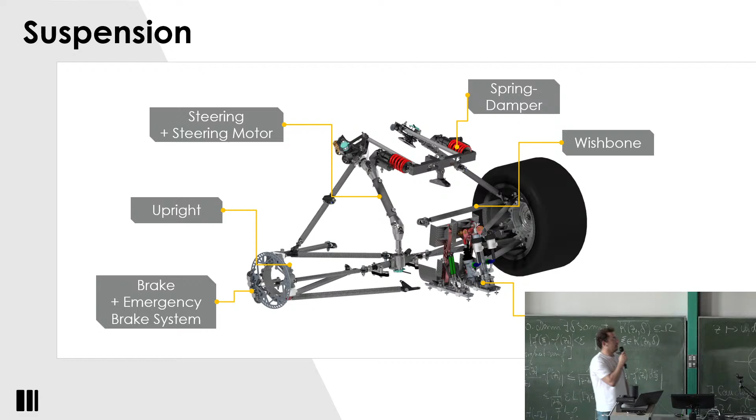So everything in the steering for our autonomous car, we also do the steering motor, which is a pretty cool design. Then the spring damper system to make sure we have the best mechanical grip we can get, the wishbones, and the upright that basically holds all the parts inside the wheel assembly. Then also for our driverless car, the emergency brake system, which is basically a device where we can hit a button and the car will stand still or brake hard, and also help our driver get a good feeling for the throttle and brakes.

Then also a big part is vehicle dynamics. It's a pretty interesting and major part of our whole team, because in vehicle dynamics we basically make major decisions for our overall concept. We do analysis for concept decisions, like which tire to use, where we want our mass distribution, as you can see in the graph at the bottom, and other things. We have a self-developed lap time simulation where we can see what different changes in parameters like weight have on our lap times, and thereby decide what we want to do with the whole car.

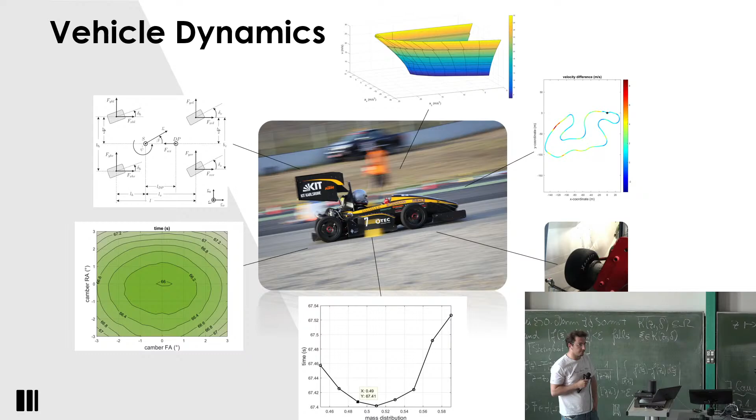Then also a big part, which basically combines the two things, is testing and validation. In the summer we do a lot of testing on our X-Platz, as we call it, or it's called the Campus Ost. We can see what the changes we made have achieved in lap time and overall performance, and also test with sensors whether the changes happened as expected, or if we've made some big errors or failures, because it's always important to see if the changes bring you any good.

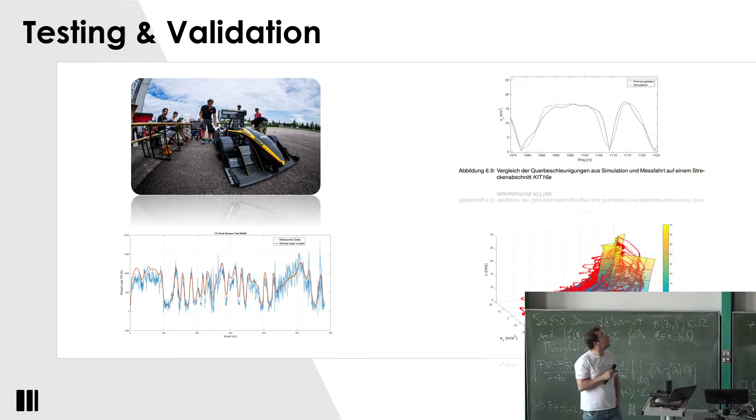For testing, we also go on test benches. Here, for example, you can see a test bench at KA. It basically moves the car up and down to see if our dampers are rightly adjusted. The basic goal is that the tire is always in contact with the platform and that there are no big changes in the normal force on the platform.

But we also do pretty straightforward road testing. We do some tuning testing, just steering in certain ways and looking at what force we get at the steering, and checking if these forces match what we calculated they should be.

So it's a perfect mix of designing, calculating, and testing. And I think now we will explain more so we can discuss that.

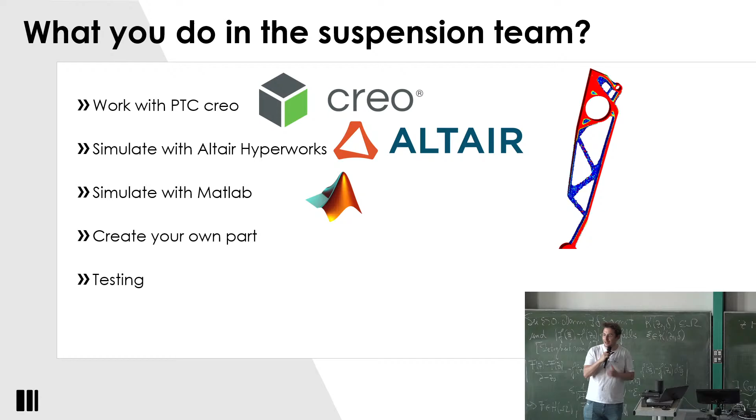Hi, I'm Robin. I'm currently the sub-team leader of the aerodynamics department. One slide, please, again.

What we do is design an aero package for the car, so we have the most flexible downforce you can get, other than in Formula 1. The drag - German Luftwiderstand - isn't important because we drive slower than 100 kilometers an hour on a regular basis, so we only care about maximum downforce. Our part of building the car is to build a package that provides the most downforce while having the best balance for the car, so the driver has a really stable and good drivable car.

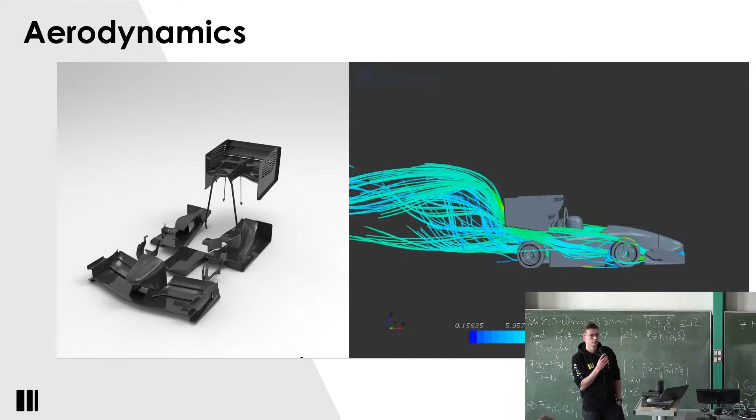You build your part, for example in Creo, and then we simulate it and see what effect this part has aerodynamically on the car. After you see the effects, you can change it, simulate it again, change it, simulate it again, till the whole package works well together.

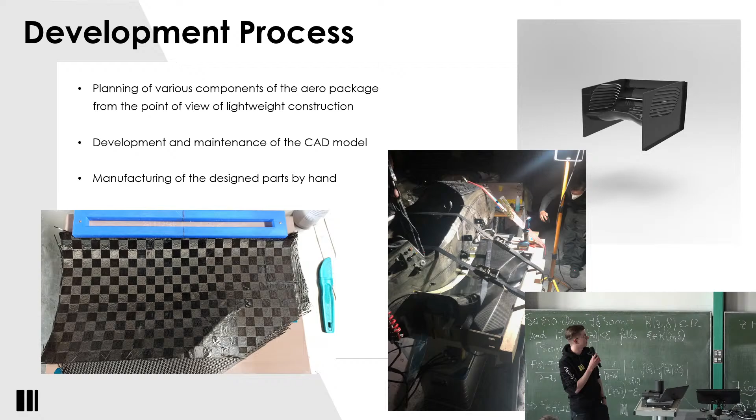And after we are finished, after a month of development, we will build the car at our workshop out of carbon fiber, and this is all manufactured by hand. And for the CFD part, our CFD lead is going to explain something to you.

Hello everyone, I'm Akshay and I'm doing the CFD for this season. So as my dear team lead already mentioned, once anyone has designed a part in Creo, you have to check it in a virtual wind tunnel, because in aerodynamics the parts may not work as intended. So it's always good to run all the iterations through a CFD software and check how it's actually performing.

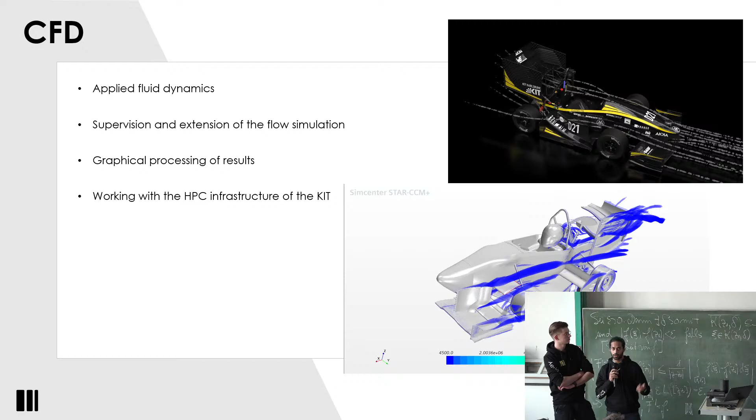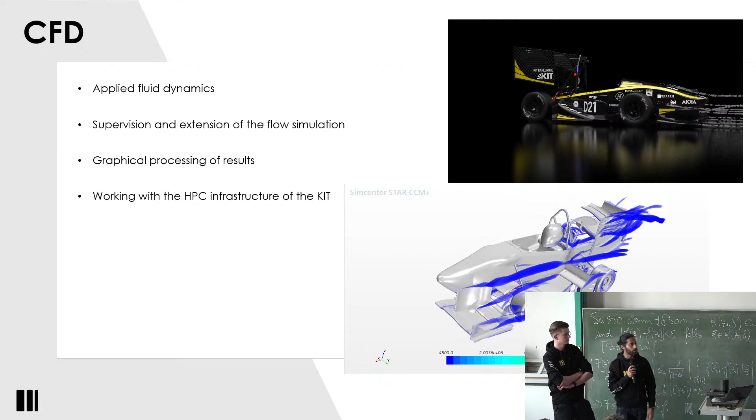For this we use a software called STAR-CCM+, a CFD software by Siemens. In our simulations we generally have two types: a straight line simulation or a cornering simulation, where we either simulate the car going straight or have it cornering. For this we generally use high performance computers, like supercomputers such as the bwUniCluster or HoreKa Cluster. On average, including all the processing of images and solving, it takes about 6 to 7 hours to solve one simulation.

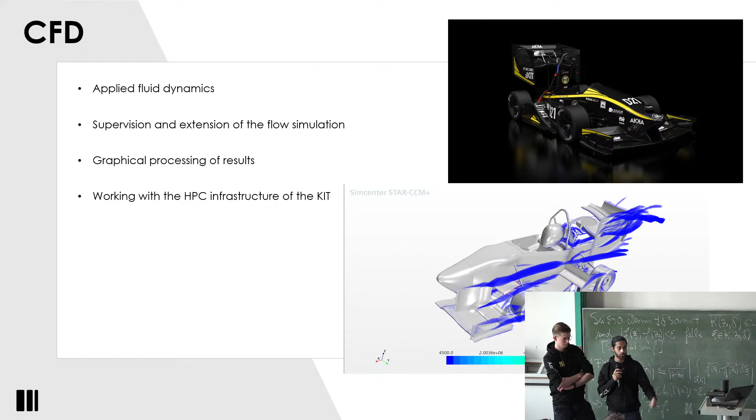So once everyone's done with their part, I'm basically jobless. But there are other things you can do as the CFD person. You can write different macros to automate the process as much as possible, which is really useful, and for that we use Java. So yeah, that's part of the CFD.

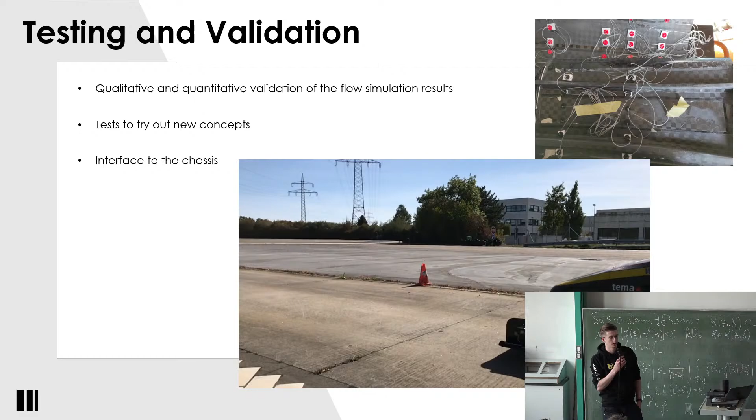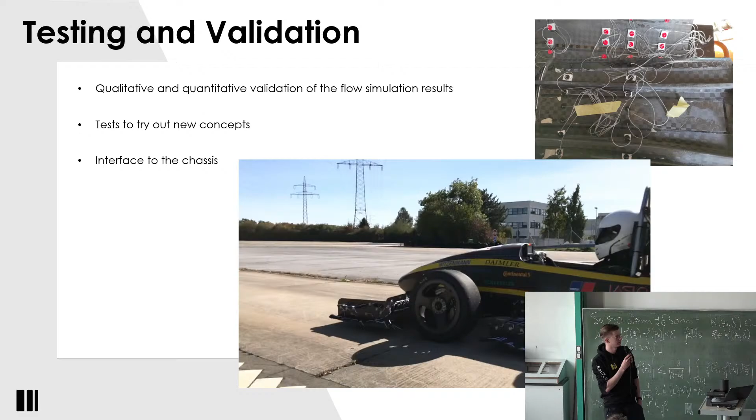Thank you. The last thing, once we've finished our aero package for the season, is to test and validate it. We have all the simulations done, but the question is whether in real life the aero package works as intended. So we build aero rakes, which you may know from Formula 1 testing phases. We build them with different kinds of sensors, as well as building testing wings and running different tests. With that testing, we work together with the suspension sub-team to see how the car performs and how we can tweak it to have the best performance as we go through the races.

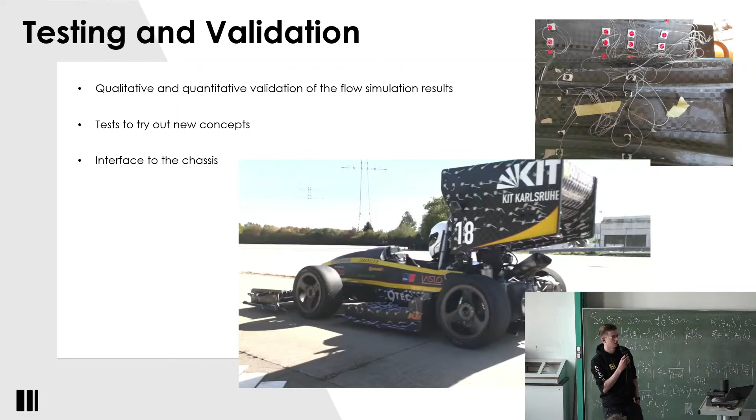Hello, I'm David, I'm a member of the autonomous system team. What we are doing, we are responsible for our driverless car, and we are developing the software for it.

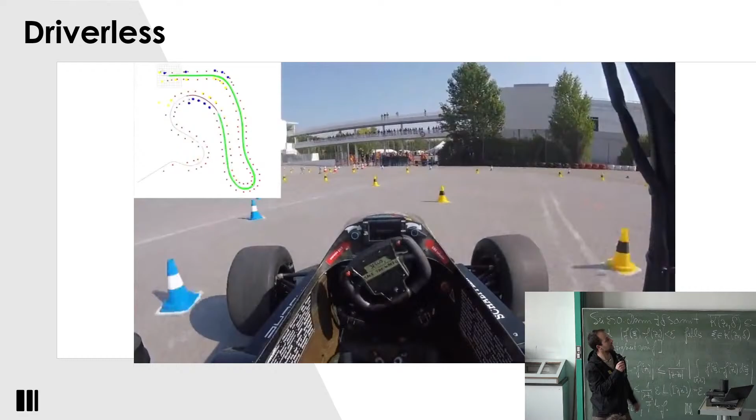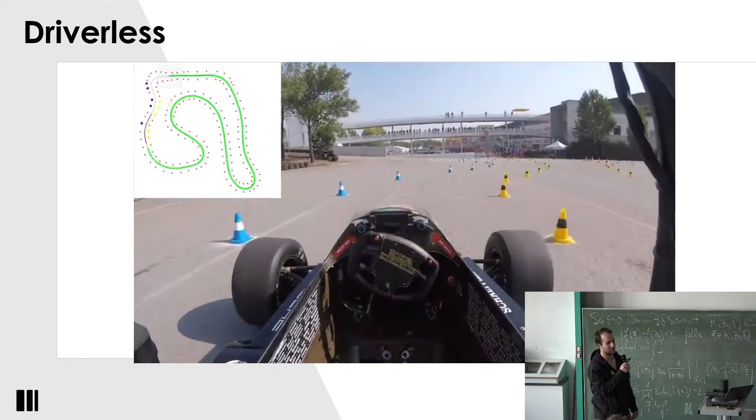What are we using for that? Like I said, we're doing the software development mainly in C++ in the framework ROS, Robot Operating System, but we're also using some other programming languages like Python or MATLAB. If you know them, it's good to work in our team, if you don't, it doesn't matter, you can learn them.

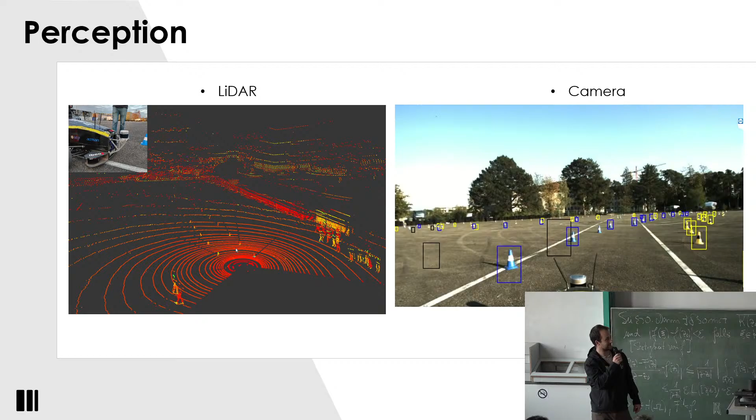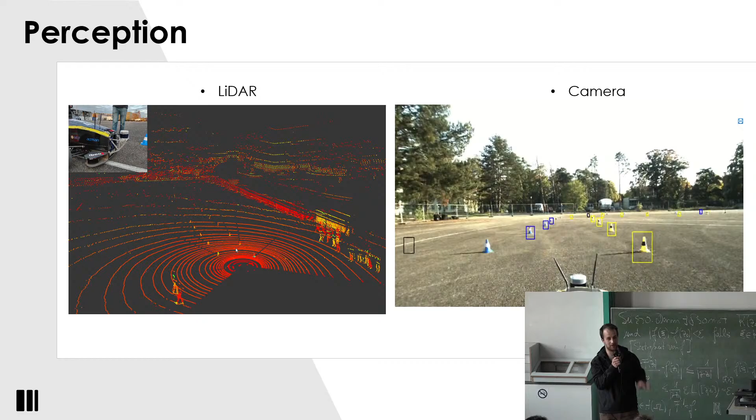On the next slide you will see our perception. What we are using for perception is the lidar on the left, giving us a point cloud to detect the cones. We also use, or will use, a camera to detect the cones, where we use a neural network to do the classification of these cones.

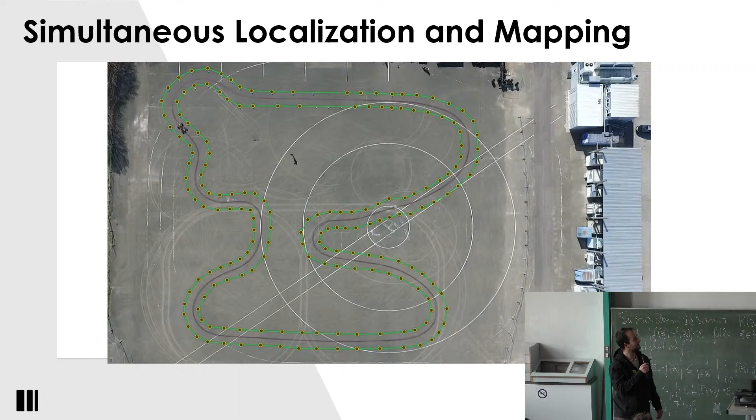So how does the work in the autonomous systems team usually look like? Well, of course we are coding, we start writing the code. Then we test our code in a simulation before we afterwards go to the track and test our car in real life. For me personally, that's the best part, when you can test your code on the real car and let it drift around the corners.

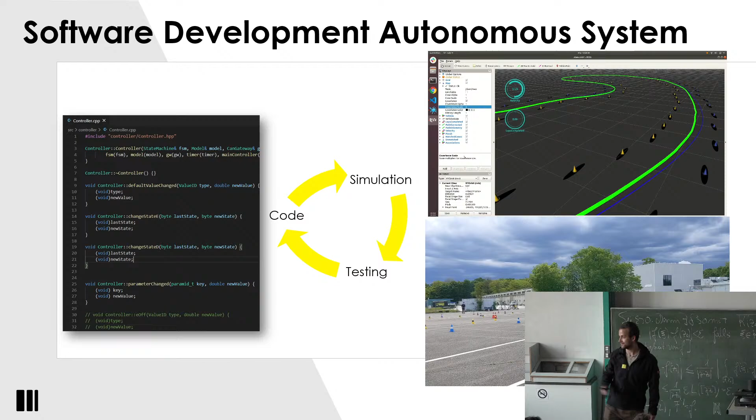Then to the electronics, I'm also there, I'm the subteam lead of the electronics. The electronics work is split into two major things. One thing is the software development for our microprocessors, the TM4Cs, which maybe you know from the electrical engineering workshops at the university. But we also do the hardware design of all of our control units.

So none of our control units in the car are bought from the manufacturer. We design them all on our own, program them on our own, and use them on our own.

So we also have the hardware development and the software development, and of course we need to analyze what's happening with our control units, and that's where CAN bus comes into play. That's the communication bus in our car, used in basically every car in the world.

Next slide. How does the development process look in the electronics team? First of all, we try to think about ways to improve on our current design. If it's perfect, nothing is changed. If not, we have to change something. So we start with the schematics.

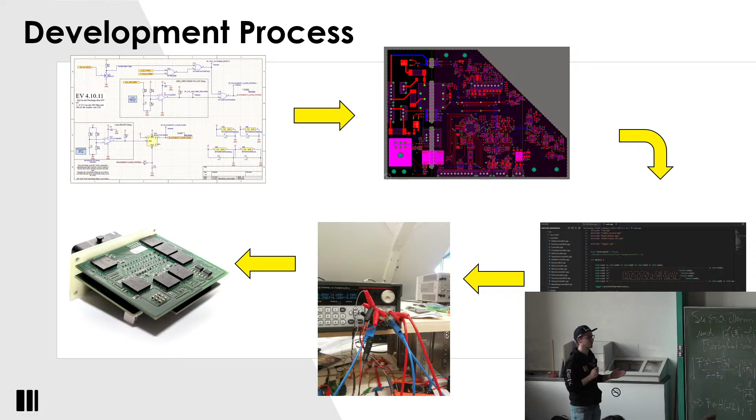If you wonder what the pictures are about, the picture in the middle, the colorful picture, is our circuit board, which is the high voltage battery management system. This is the board which is inside the accumulator container, and basically makes sure that our battery doesn't go into flames. On the next slide, you will see some other products of ours.

On the top left, you see our wiring harness, because we have to connect our control units somehow. On the top right, you see basically the switch in the car, which is responsible for turning the car on and off, or the control units for that matter.

Then our sensor boards, because we have to know what is going on with the car. That's why we have sensor boards to look at the sensor data and give them to people like the suspension team, because nobody knows what they are doing. On the bottom right, you see the final masterpiece working.

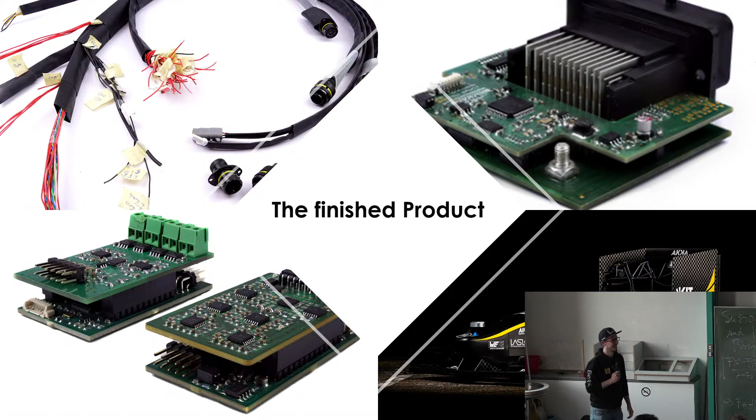On the last slide, I have some quick facts for you. We have around 30 electrical control units, all designed on our own. We also use professional equipment, stuff like Altium Designer, which is used in the industry, or the software we use to analyze the CAN bus, which is also used in the industry.

That's the great thing about KA-RaceIng, because all those firms which produce that software give it to us for free. I already told you about our control units, stuff like the battery management systems, or the main control unit, which is the brain of the car, and turns it on or off, and tells it how to drive. That's for the electronics.

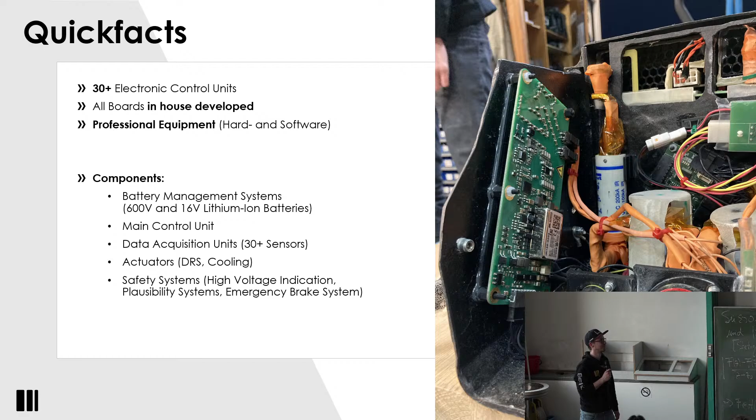I hope I could convince some of you. And the next one is wonderful.

I'm Felipe. I'm in the second year of KA-RaceIng, and I'm the sub-team lead of the chassis or monocoque sub-team, which is responsible for the biggest part of the car, the monocoque, and all the other structural parts of the car, which means the rims and the seat and so on.

Now the next slide. Here you can see the CAD model of the chassis from last year. Basically, the huge carbon fiber part is included in the chassis sub-team. You have the rims, which are made out of carbon fiber, the ergonomics, so the seat and the steering wheel, which you have to design as well, so the driver is as comfortable as possible.

Then you also have the crash box in front, because that's mandated by the regulations. You have to make crash tests for that to demonstrate that it actually works, because it's important that the driver doesn't die in a crash if it happens. Then, of course, all the carbon fiber parts have to be simulated beforehand, because we don't have that much money to build a thousand prototypes to test them. That's all the most important parts included in the monocoque sub-team.

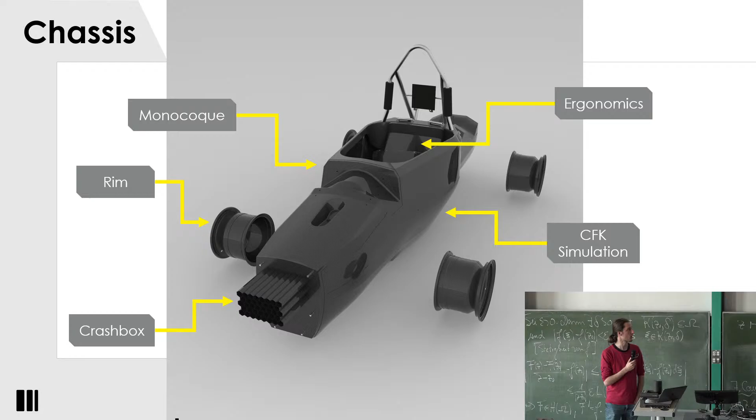So the general process of the monocoque is you do some pre-development at the end of a season or at the beginning, test out what kind of configuration we want in the car, where's the battery, how does the battery look, where does the driver sit, how does he sit, is he more upright, is he more reclined, and so on.

Then you develop some concepts in CAD, see what works, what doesn't, try to realize your ideas, and then you design more, do some Creo work, or try to get it to work with Creo, which never really works the way you want. That's an image of the current model in CAD that I designed for the monocoque.

After the design, you move to the manufacturing, so you start laying some carbon fiber. You can see the monocoque from the inside, or on the right side, you see the first layer of carbon fiber, where you try to lay it as cleanly as possible, so you get an accurate representation of the simulation and the real world, so you can compare those two.

You try to lay the carbon fiber, and after that, you have the rolling chassis where the monocoque is completed, and you can move on to manufacture all the other parts. That's the general design process.

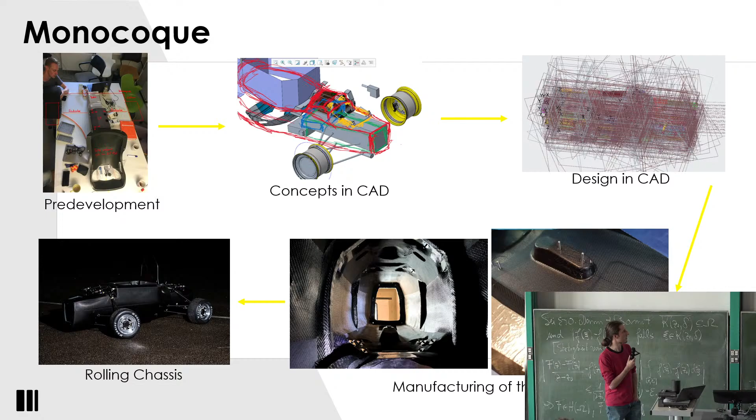Then there's of course the simulation, because the chassis gets huge loads from all the wishbones and so on that are transmitted into the car. So the chassis has to be simulated to withstand those forces, which is a very long process, all done in Altair HyperWorks as well.

We use that not only for the FEM simulation of the suspension parts, but also of the carbon fiber parts, which is a very long, but also very interesting process that is complicated, but you can learn a lot from that. It basically uses all the loads we get from the different parts in the car.

And then tries to make a light car that is still very stiff for the suspension, because if the chassis moves or twists under load, that's not ideal for the suspension, because then it behaves in ways you don't want. So we have to make sure that the chassis is stiff and doesn't move.

But if we make it stiff and immovable, it also gets heavy, which is also not good. So we have to find a compromise and make it as light but also as stiff as possible, which is what we mainly use the simulation for, which we then try to apply to the manufacturing.

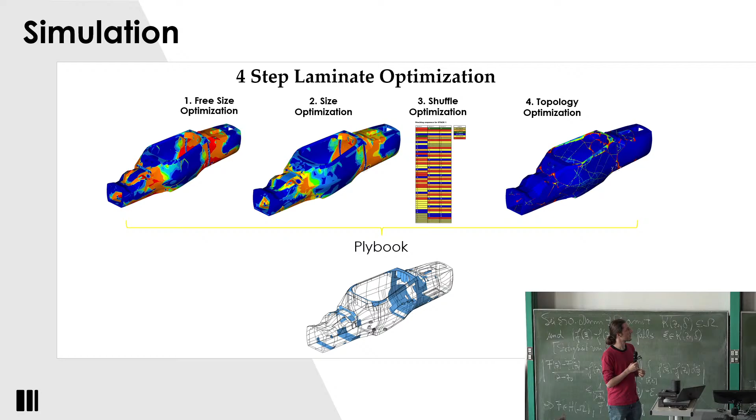Then you obviously do some simulations on the carbon fiber rim to make sure it doesn't break like last year. That's a funny story for later.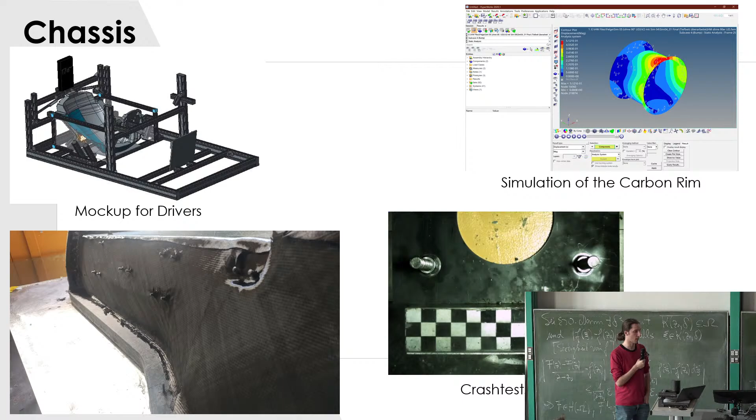And then on the lower left, you can see the current picture of the current chassis that we are working on. This is from yesterday, I think, which is basically where we are manufacturing a mold for the chassis out of carbon fiber as well. So not only do you do simulations and designing in CAD, but you also work with carbon fiber.

Now we have the powertrain. Hey, I'm Vincent, I'm from the powertrain. Next slide, please.

Thank you. What parts are in the powertrain? Firstly, we have the battery. Then they give juice, power, to the inverter and power electronics. They distribute the power to the electric motors. And the last part in this chain is the gearbox, which then gives the power to the wheels and to the tarmac.

So the powertrain is vital for the car to drive, because if the battery is not juiced up, there's no drive. Next slide, please.

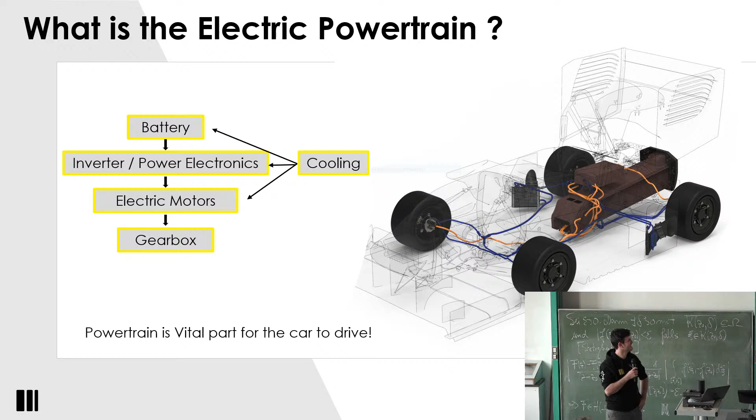So here, some hard facts, quick facts. The battery has a peak voltage of 600 volts, energy of 7.3 kilowatt hours, and a weight of 52 kilograms - the battery is the biggest part and the heaviest part in this car.

And then we have a picture of the gearbox. One gearbox can give the wheel a maximum torque of 300 Newton meters. We have 4 of those in the vehicle. One weighs 2.1 kilograms, and the efficiency is at 97.2%. That's already pretty good, but we want to do better. That's why we need you.

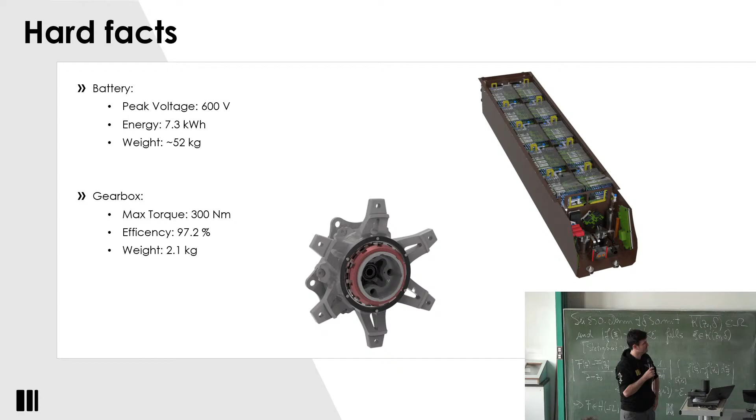Next slide, please. Yeah, how do we develop the powertrain?

So this is basically the same in all sub-teams. We have different phases in the year at KA-RaceIng. First of all, we have the concept phase, where we decide what we want to change and do better, or leave it as it is.

After that, we go into the design phase, and that's where the actual construction is done. We mainly work in CAD, but we also have other software tools, as you can see at the top there. After the construction, we also have to validate via simulation that the things we build in CAD aren't crap.

We are also very proud that we basically build every part of the powertrain, and every part is self-developed. We manufacture the motors, the power electronics, the battery. Basically every part in the car from the powertrain is self-developed, as for the other sub-teams, the other parts, but especially for the motors we are very proud.

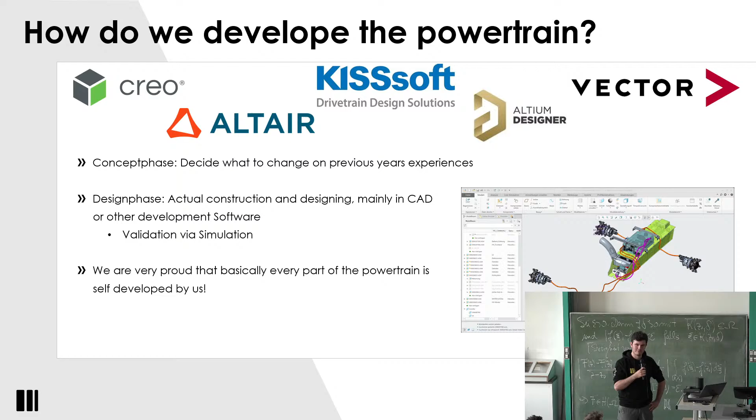After the designing, what do we do? We build all the parts ourselves. On the top left, you see a picture of the manufacturing of the PCBs for the power electronics. The second picture is from the manufacturing of the batteries. The next pictures are from the motor, gearbox, and cooling system. So basically every part is built by ourselves, as I said before.

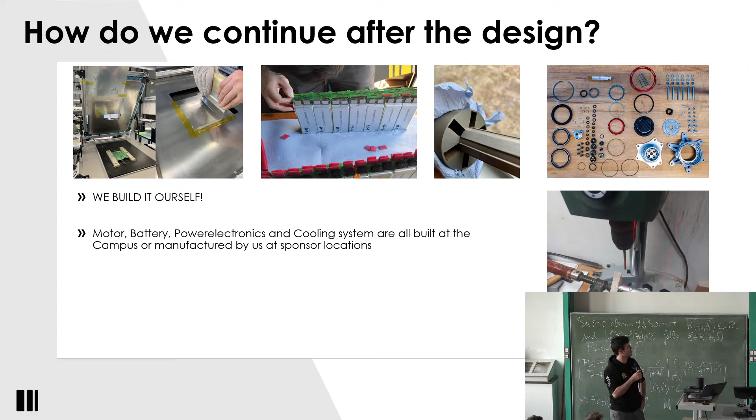Or they are manufactured by sponsors of us.

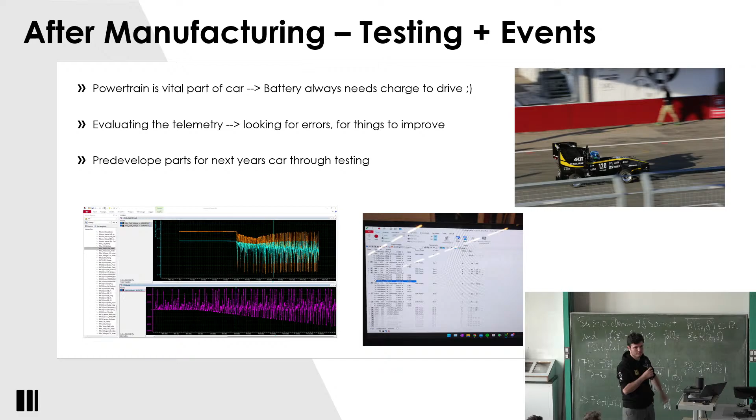After the manufacturing, testing, and events, this is where the fun begins. We evaluate the telemetry, look for errors, things to improve. Is the car behaving as we want it to? With that information, we can pre-develop basically every part for the next years through the testing. So that's quite cool.

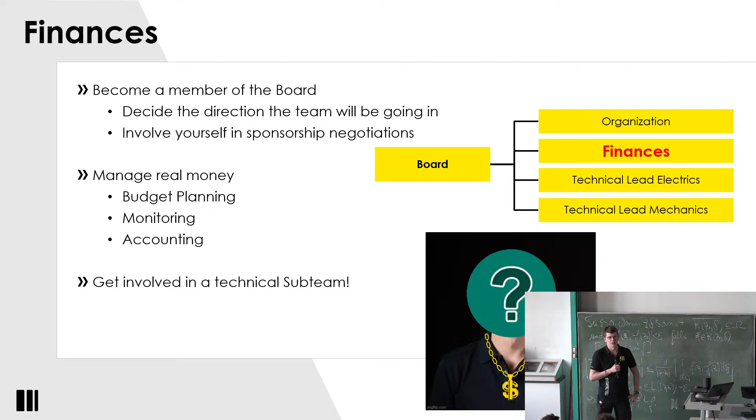But it's also possible to get involved with a technical sub-team, so you don't only have to do finances. Most of the finance guys in the past, and me as well, were involved in a technical part at some time. So we hope to get some of you to become a finance guy.

Yeah, so over to the marketing. Thank you. Hi, I'm Farabi. I'm this year's marketing sub-team leader.

One obvious thing about the marketing is, of course, we manage our social media channels. For example, Instagram, we post most stuff there. But we also have a Facebook and YouTube channel and everything, you probably already saw it if you Googled us once. We also take care of our website and write monthly newsletters to our sponsors, so they keep giving us money so we can build a nice car.

But how do we get those nice shots for our social media channels? Well, we also have a photo and film guy who basically captures our journey in the team, milestones, or takes pictures for a nice calendar.

But we also film some cool videos for our sponsors. For example, when they give us a product, some of them at least want a short video of us using it so they can upload it on their social media. So yeah, we also film that. And one very important task is the rollout videos, obviously, because who doesn't like a good video at a big event?